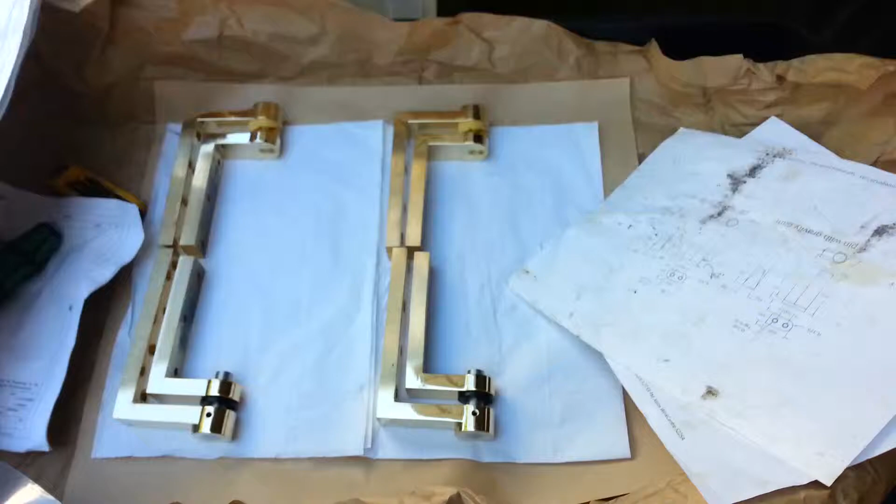Hey, here we have the large knuckled pivot hinges made for Aaron. And what you'll see first is the T4 pivot. This is that manufacturing drawing for it. And here is the T4 pivot.

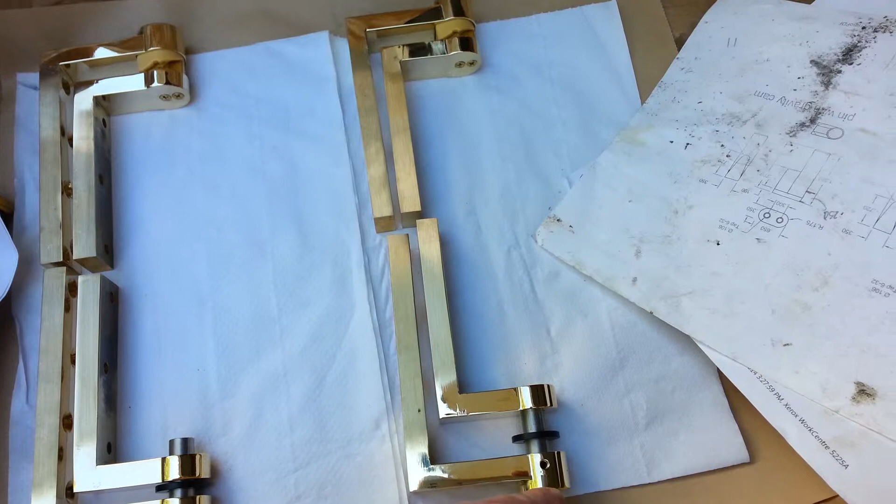This is top of the door jamb. You'll notice the T4 pivot has a set screw holding the stainless steel pin in it. And that pin connects the T4 pivot to, and here we're looking at these upside down. Let's flip around. Excuse me. Here we go. The T4 has a pin held in place with a set screw.

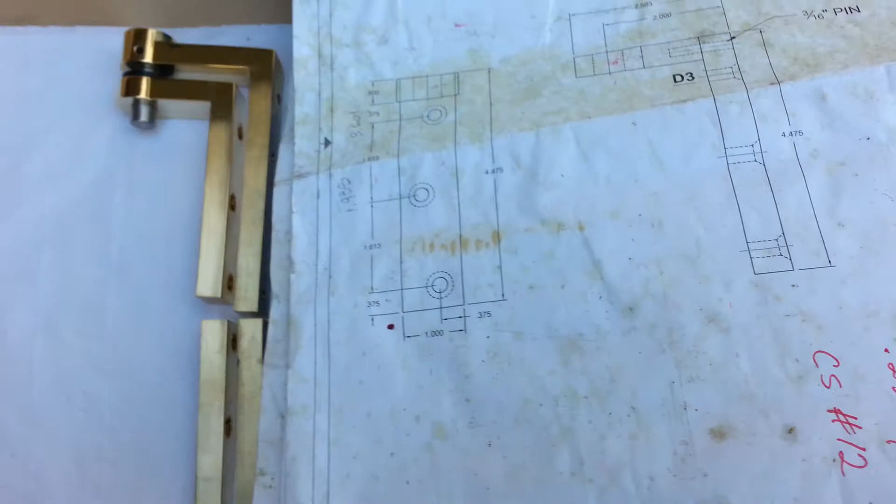That pin connects it to the D3 pivot, and here's that D3 pivot with those dimensions. You'll note space in between them. Look at the extra length of the pin, and that's because of the D3 and B2 pivots. So let's go to the special D3 pivots for the bottom.

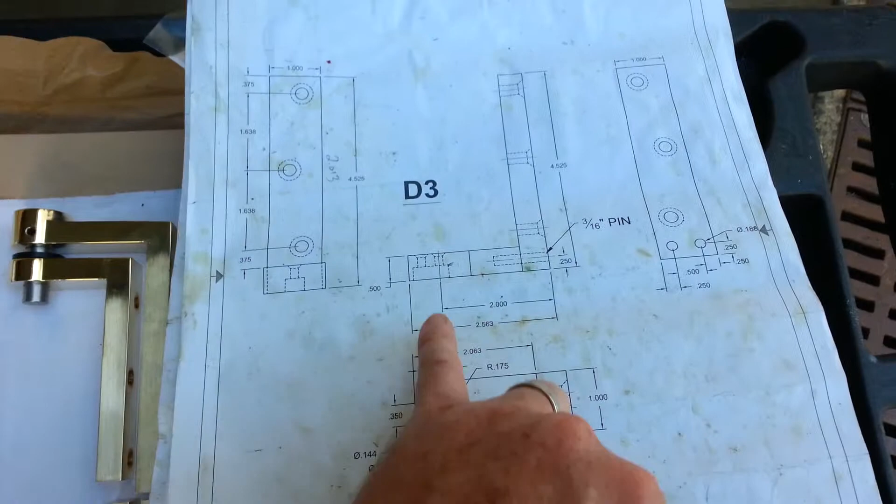And here's the D3 pivot that mounts on the door, and that's got a slot and some screw holes holding a special pin in. You'll see that special pin with a ramped point. And there are those two screws, and we'll show you how to take that all apart in just a minute so you can put it back together. That D3 connects to the B2.

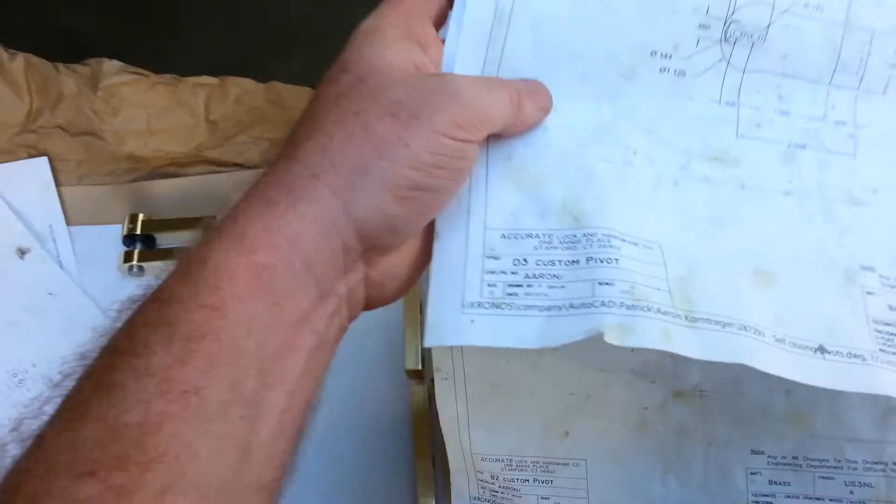Now the B2 is pocketed to accept a Hillman nylon ramped bearing surface, and that's what makes this self-closing. So you'll see that ramped nylon bearing surface is held in place with this screw and held in alignment with its own geometry in the pocket right here.

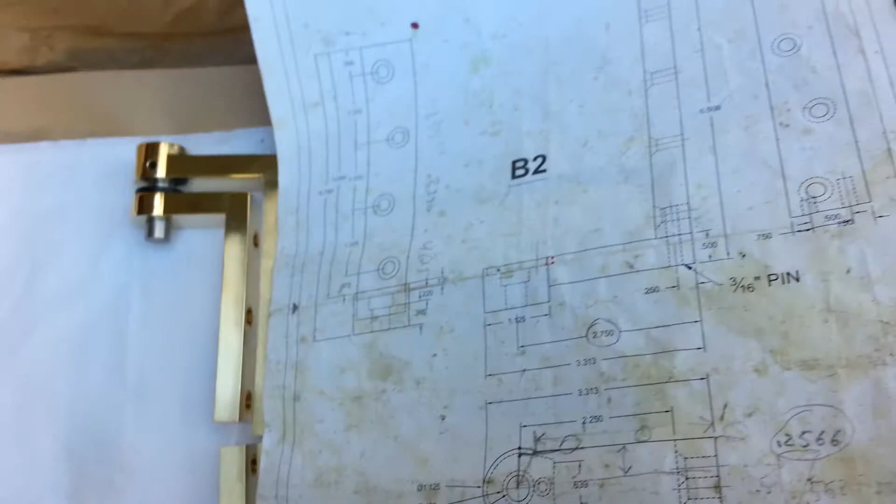So let's get further on this, and to make this work, you take the set screw out here. That set screw is an 832 set screw, and you take it out with a 5/64 Allen wrench, or Allen key, sometimes people call them. And there you go, that'll pull right out.

So when you're getting ready to do your finishing, you would take this out all the way, set it to the side, put these aside and do your finishing. Alright, so that's all ready. You've got this here, and you've taken that set screw the rest of the way out, put it safely in a bag aside, so you're ready to do your finishing.

Alright, for the bottom of the door, you've got a couple of things to take out. So first we'll take out these two screws, and I'll show you those parts. Alright, sorry about that. There we go. We've taken out those 632 Phillips flathead screws, and we've taken that bottom pin out with the point that cams, and you'll see that that's machined and set so that it fits into here. So you're going to want to take that apart.